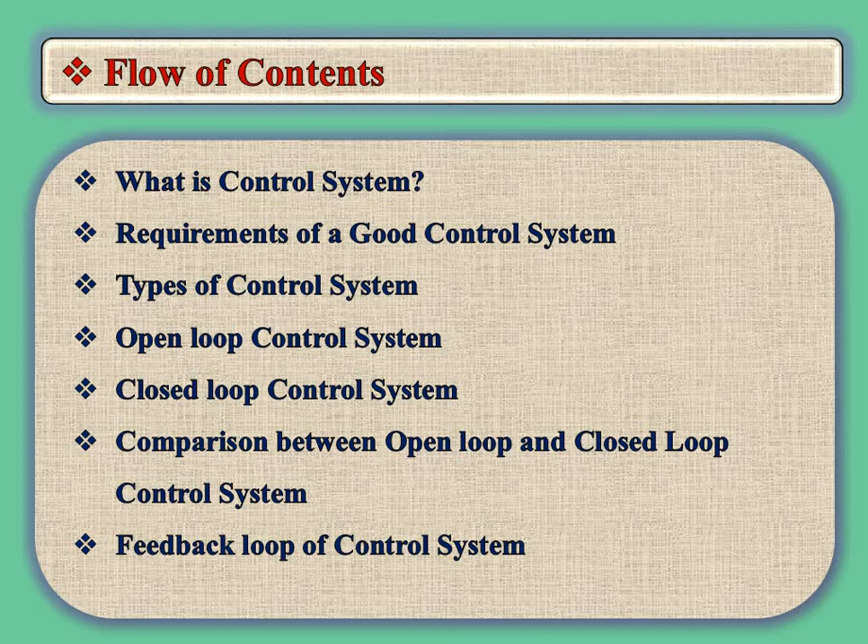What is control system? In recent years, control systems have played a central role in the development and advance of modern technology and civilization. Practically, every aspect of our day-to-day life is affected less or more by some control system. Water level tank, refrigerator, air conditioner, geyser, automatic iron, automobiles - all are control systems.

The principles of control theory are applicable to both engineering and non-engineering fields. Let's learn more about the control system.

When a number of elements are combined together to form a system to produce desired output, then the system is referred to as control system. In other words, a control system is a system of devices or a set of devices that manage, command and regulate the behavior of other systems to achieve a desired result.

In the figure, we can see the basic block diagram of a control system. The main feature of a control system is that there should be a clear mathematical relationship between the input and output of the system.

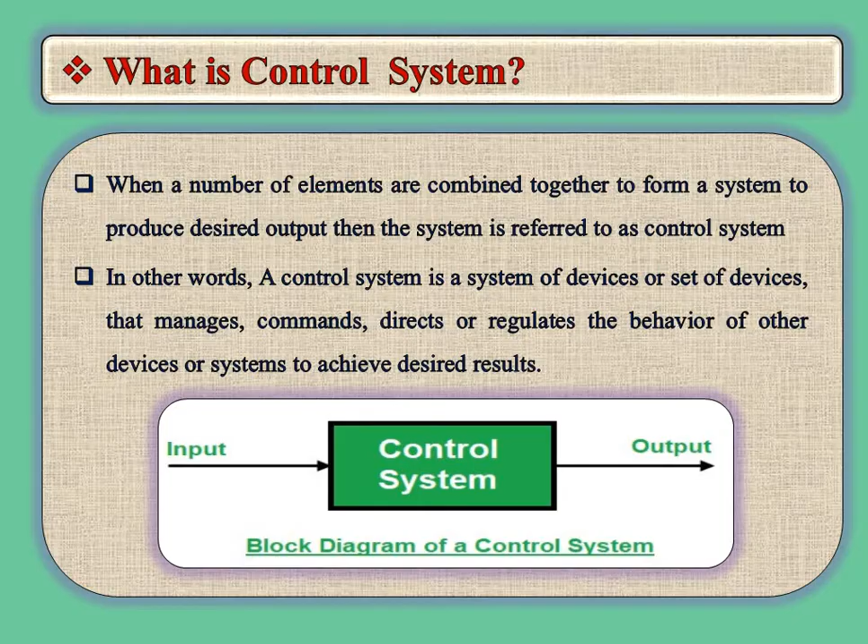The next one is requirement of good control system. The first one is accuracy. Accuracy is one of the most important characteristics of an automatic control system. Accuracy is defined as the limit of the errors made by the instrument when it is used in normal operating conditions. Accuracy can be improved by using the feedback element. To increase the accuracy of any control system, the error detector should be present in the control system.

Next one is sensitivity. The parameters of a control system are always changing with change in surrounding condition, internal disturbance, or any other parameters. This change can be expressed in terms of sensitivity.

The next one is noise. Noise is an undesired input signal. A good control system should be able to reduce the noise effect for better performance.

Next one is stability. Stability is an important factor of control system. For a bounded input signal, the output must be bounded, and if the input is zero, then the output must be zero.

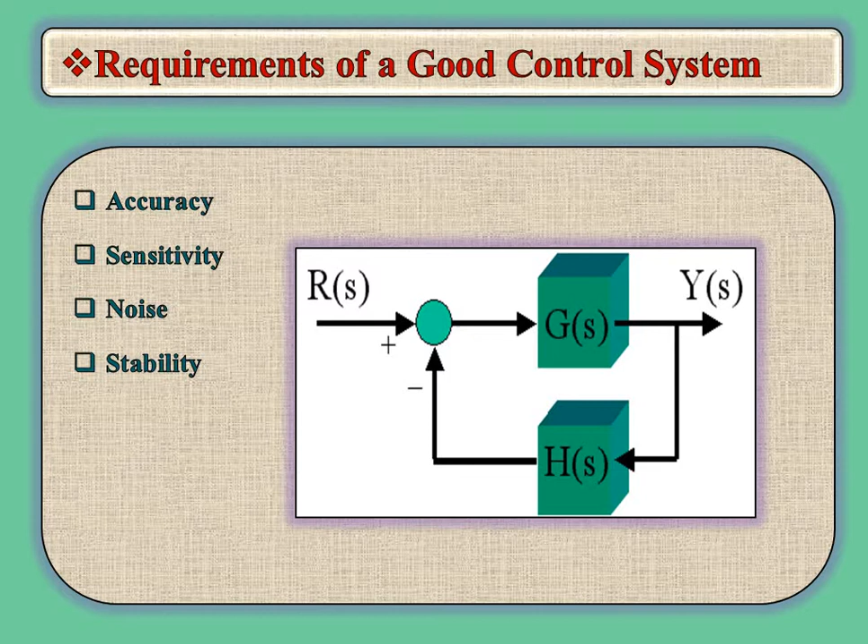Then such a control system is said to be a stable system. Next one is bandwidth. An operating frequency range decides the bandwidth of a control system. The bandwidth should be as large as possible for a good control system.

The next one is speed. Speed is the time taken by the control system to achieve its stable output. A good control system possesses high speed; the transient period for such a system is very small.

Now the next one is oscillation. A small number of oscillations or constant oscillation of output tends to indicate the system to be stable.

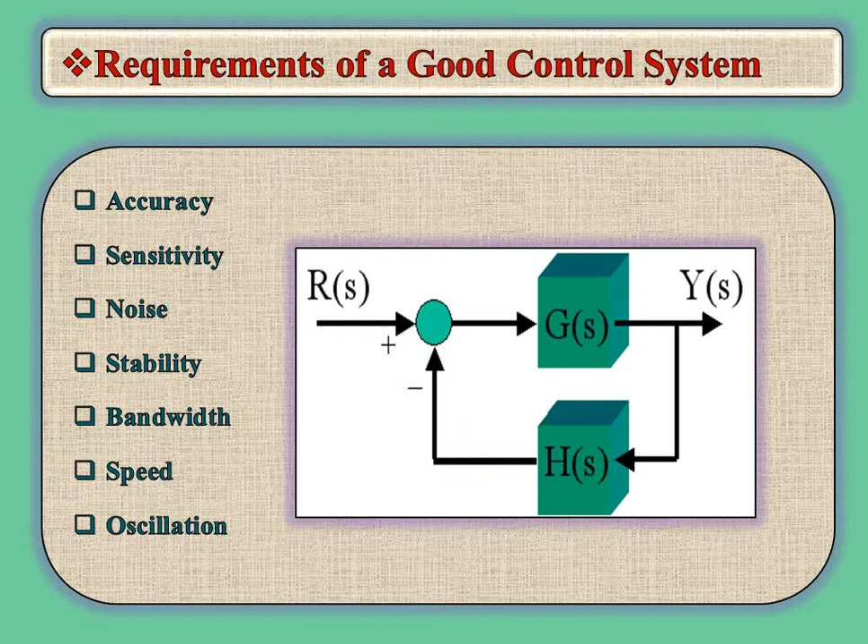Next one is types of control system. There are various types of control system, but all of them are created to control outputs. The system used for controlling position, velocity, acceleration, temperature, pressure, voltage, current, etc. are examples of control system.

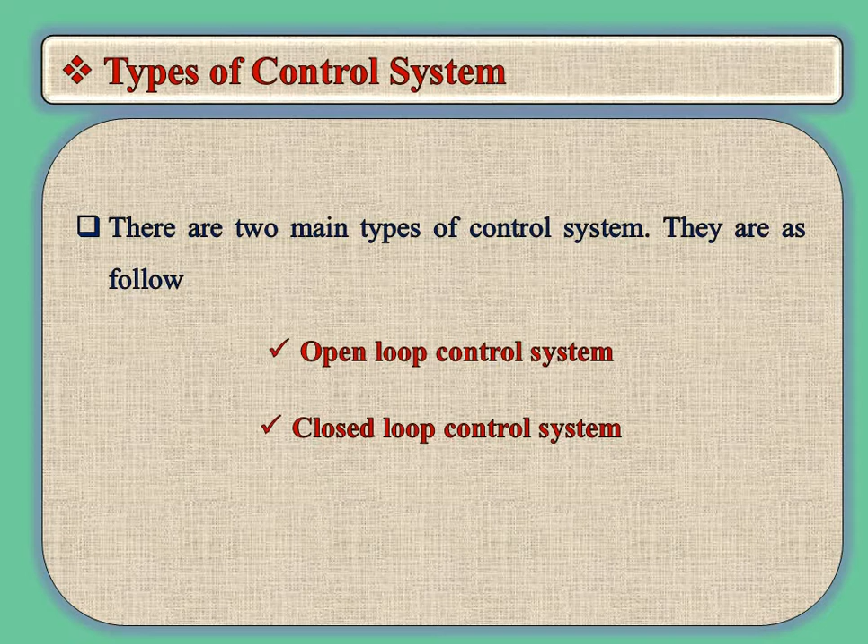There are two main types of control system. The first one is open loop control system and the second one is closed loop control system. Let's see in detail.

The first one is open loop control system. A control system in which the control action is totally independent of the output of the system is called open loop control system. A manual control system is the best example of open loop control system.

In the figure we can see the basic block diagram of open loop control system, in which the process output is totally independent of controller action. Here I again repeat, open loop control system is one in which the process output is totally independent of the controller action.

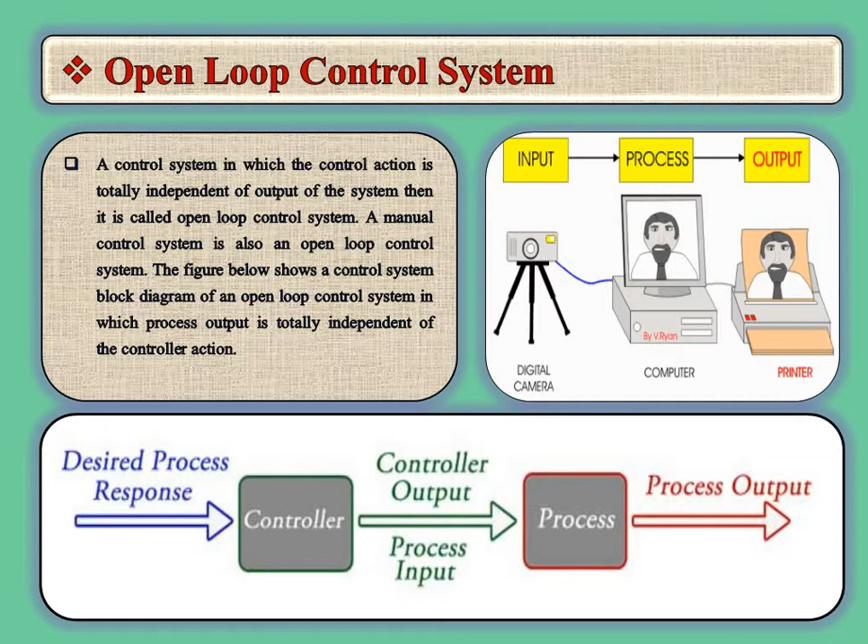Let's see the practical examples of open loop control system. The first one is electric hand dryer, second one is automatic washing machine, third one is bread toaster, fourth one is automatic tea or coffee maker, and fifth one is light switch.

One thing is common for all these examples: the process output is totally independent of controller action. In electric hand dryer, the hot air comes out as long as you keep your hand under the machine, irrespective of how much your hand is dried.

In automatic washing machine, the machine runs according to the preset time irrespective of whether washing is completed or not. In bread toaster, the machine runs as per the adjusted time irrespective of whether toasting is completed or not.

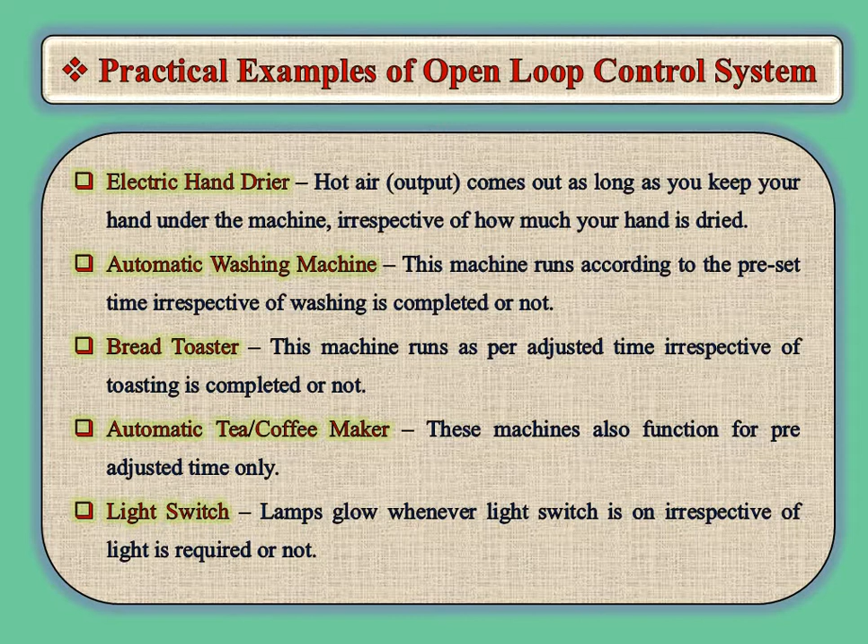In automatic tea or coffee maker, the machine also functions for the pre-adjusted time only. In light switch, the lamps glow whenever the light switch is on, irrespective of whether light is required or not.

The advantage and disadvantage of open loop control system. The advantage: they are simple in construction and design, economical, easy to maintain, and generally they are stable. The disadvantage: they are inaccurate, and any change in output cannot be corrected automatically.

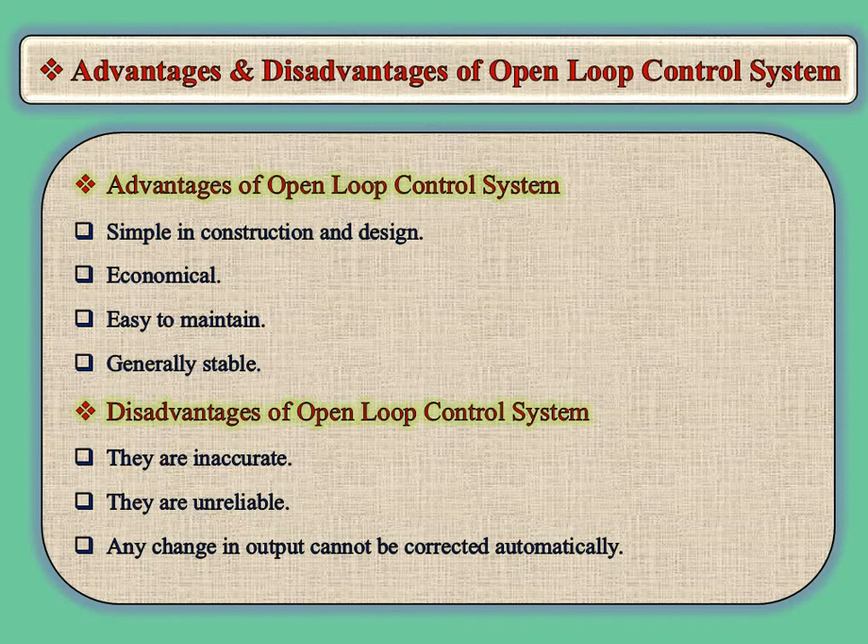The second one is closed loop control system. The open loop control system can be converted into the closed loop control system by providing feedback, and this feedback automatically makes the suitable change in output due to external disturbance. In this way, the closed loop control system is called the automatic control system.

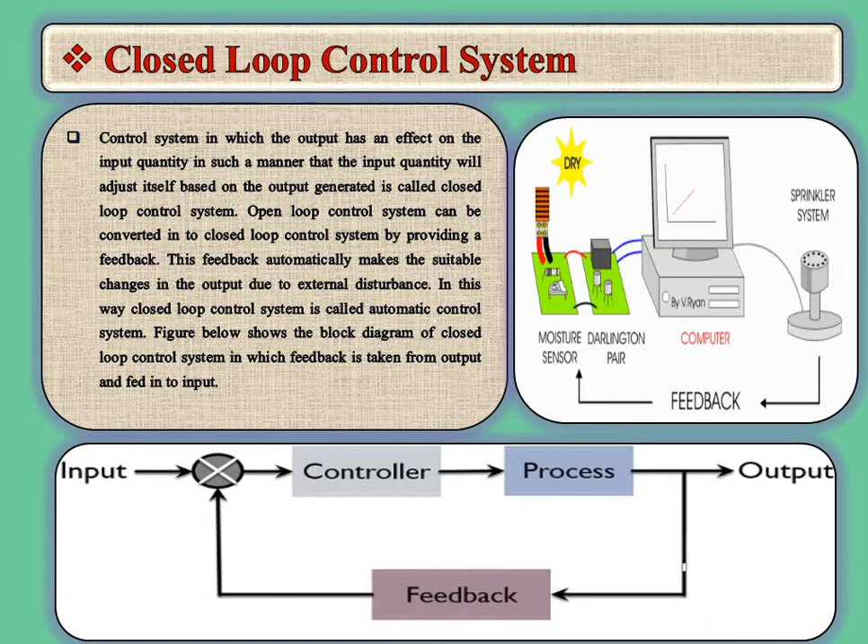Let's see the practical examples of closed loop control system. The first one is automatic electric iron. Second is servo voltage stabilizer. Third is water level controller. Fourth is missile launch and auto track by radar. Fifth is an air conditioner. And last is cooling system in car.

The one thing common in all examples is that the process output is totally dependent on controller action. In automatic electric iron, the heating elements are controlled by output temperature of the iron. In servo voltage stabilizer, the voltage controller operates depending upon the output voltage of the system. In water level controller, the input water is controlled by the water level of the tank.

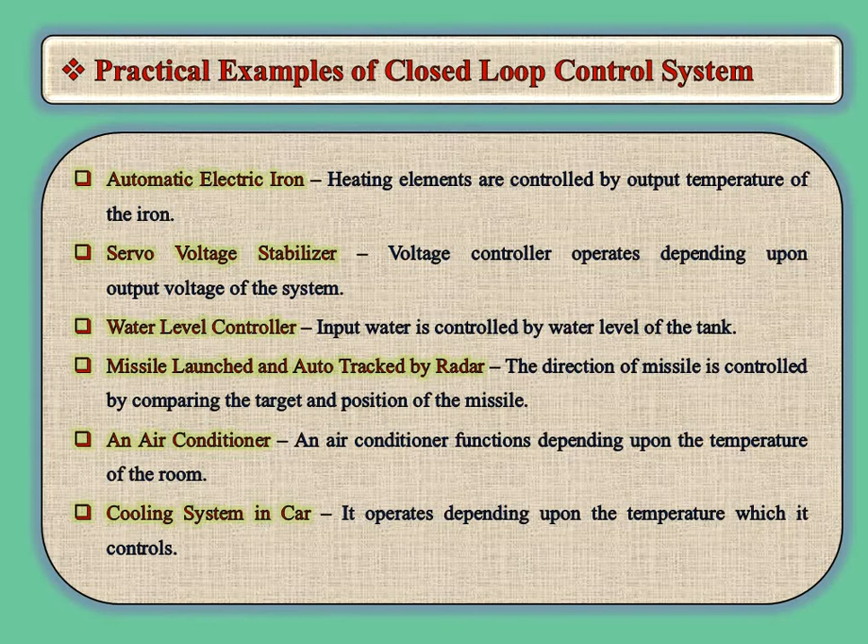In missile launch and auto track by radar, the direction of missile is controlled by comparing the target and position of the missile. In air conditioner, the functions depend upon the temperature of the room. In cooling system in car, it operates depending upon the temperature which it controls.

Next is advantage and disadvantage of closed loop control system. The advantage: closed loop control systems are highly accurate as any error arising is corrected due to the presence of feedback signal. The bandwidth range is large. The sensitivity of system may be made small to make the system more stable. This system is less affected by noise. The disadvantage: they are costly, complicated to design, and require more maintenance.

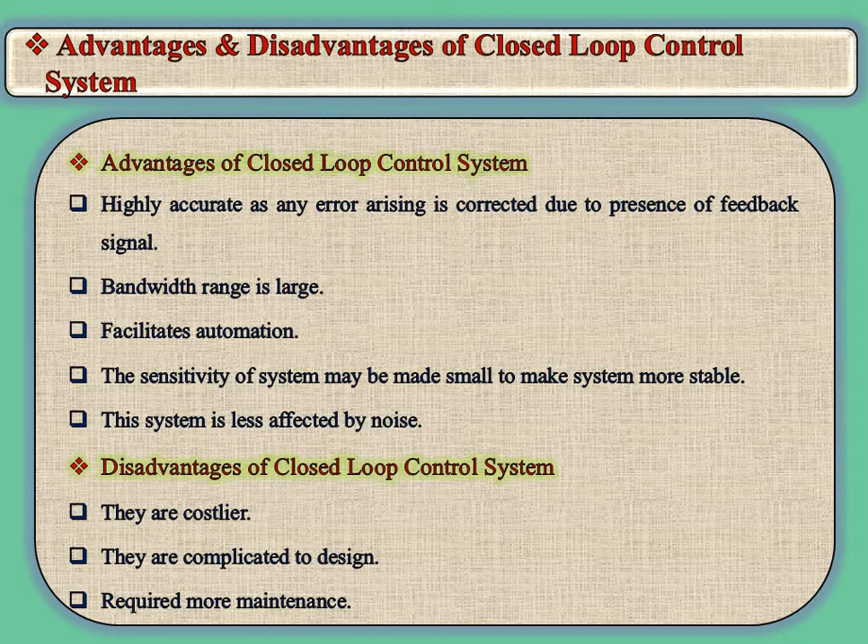Now the next one is comparison of closed loop and open loop control system. In open loop control system, the feedback element and error detector are absent, while in closed loop control system, the feedback element and error detector are present.

The open loop control system is easy in construction, stable and economical, while closed loop control system is complicated in construction, unstable and costly. The open loop control system is inaccurate with less maintenance, while closed loop control system is accurate with more maintenance due to the presence of feedback element and error detector.

The hand dryer and washing machine are examples of open loop control system, while the automatic electric iron, servo voltage stabilizer, and water level controller are examples of closed loop control system.

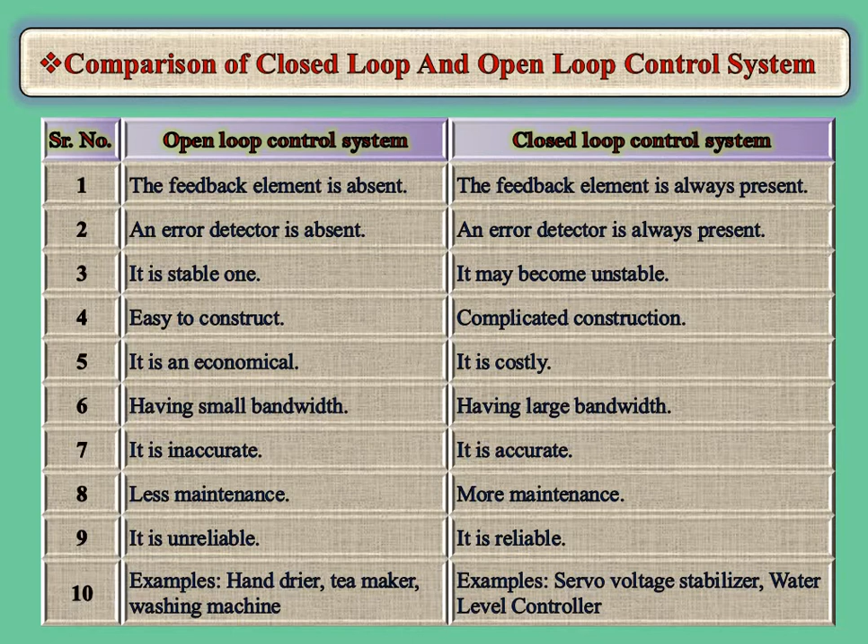When the feedback signal is positive, then the system is called positive feedback system. For the positive feedback system, the error signal is the addition of reference input signal and feedback signal. When the feedback signal is negative, then the system is called negative feedback system. For the negative feedback system, the error signal is given by the difference of reference input signal and the feedback signal.

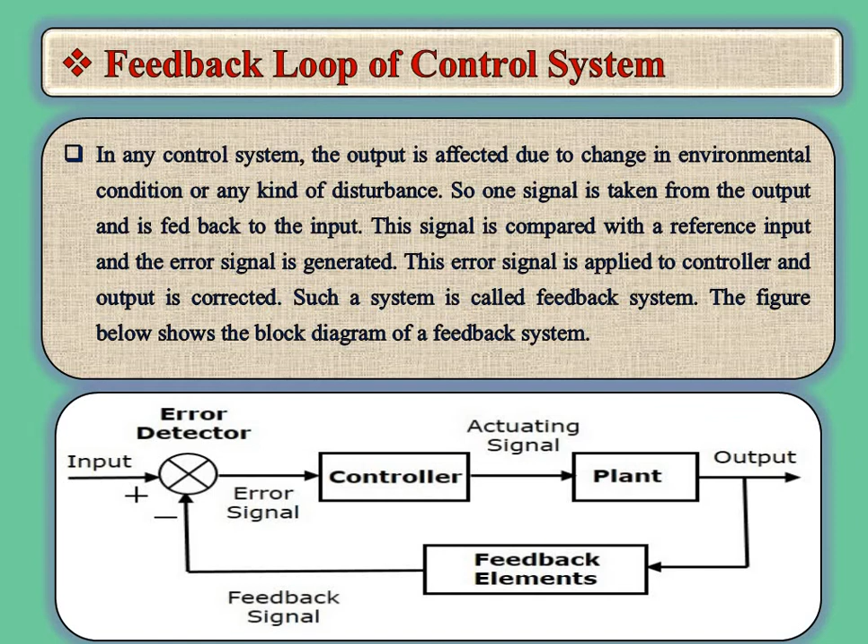Next one is effect of feedback. Error between system input and system output is reduced. Second, there is improvement in sensitivity. Stability may be affected. It improves the speed of response.

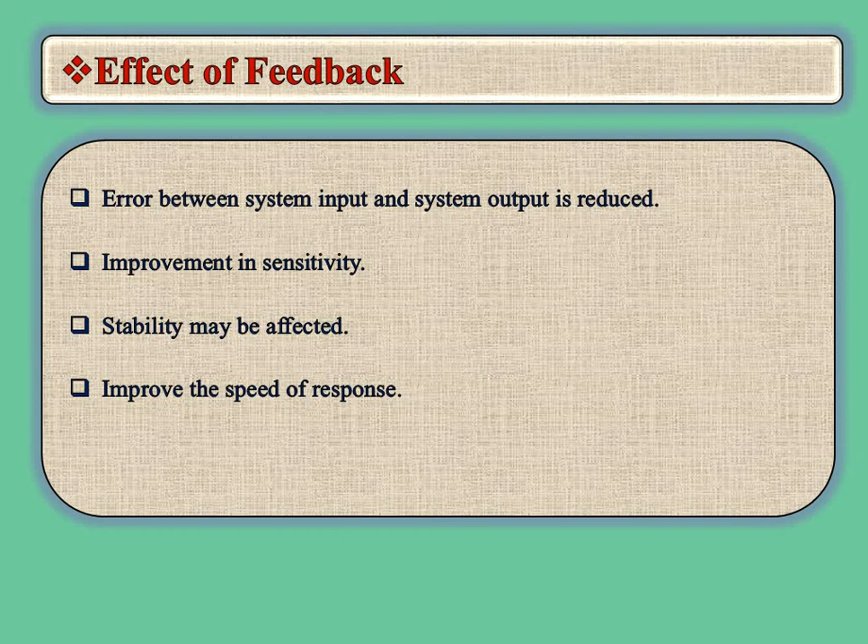Now the next one is frequently asked questions in GTU exam. The first one is: define the open loop and closed loop control system. Second question is: what is control system? Mention the difference between open loop and closed loop control system.